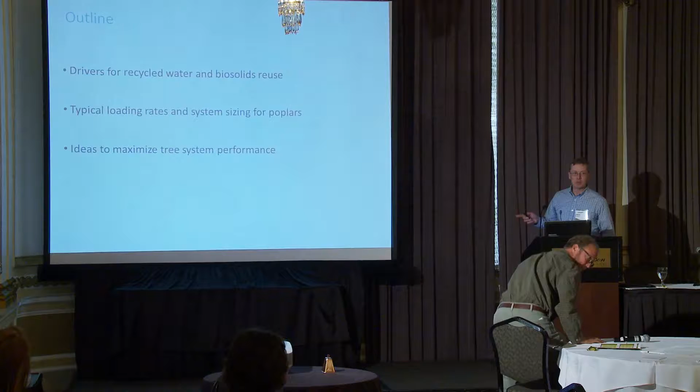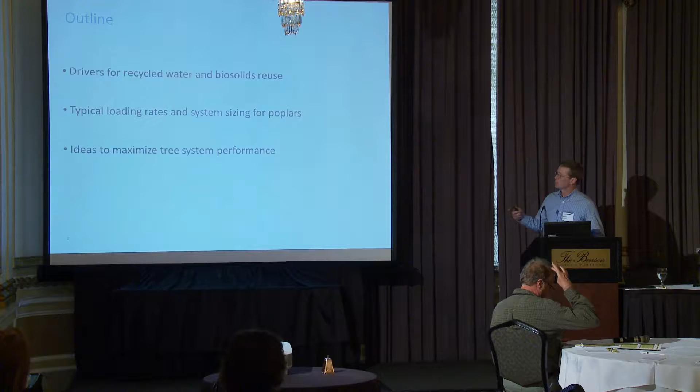So I'm going to start with just a few drivers for recycled water and biosolids use, what causes a municipality to consider this option amongst all the things it could consider for treatment. Share a few slides on typical loading rates, nitrogen and hydraulic loading that we use in the Northwest, and then a few ideas to maximize tree system performance.

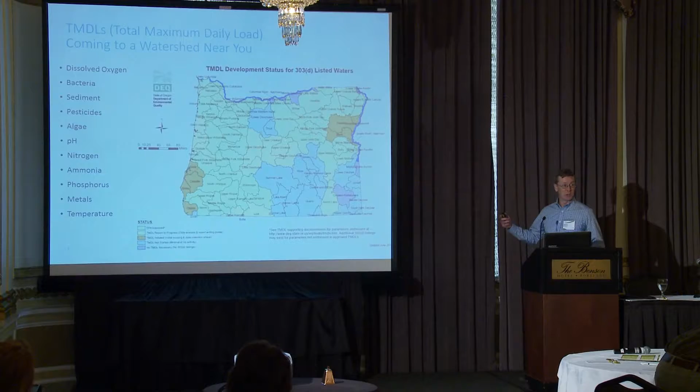So this is a map of total maximum daily load development status in Oregon. The same story applies to the rest of the states in the U.S. really, but as regulations develop, permits don't become less stringent due to anti-backsliding rules. They only become more stringent. So every new permit cycle comes with more limits.

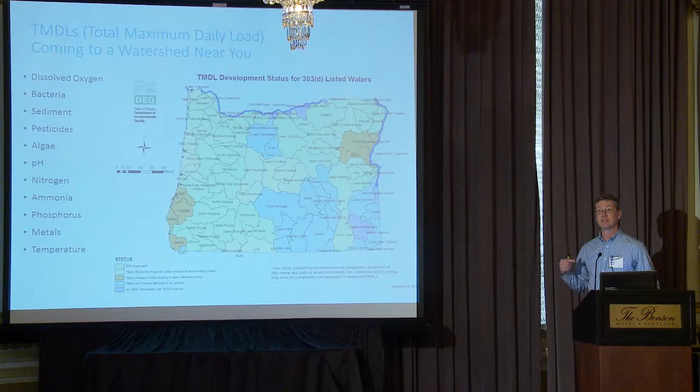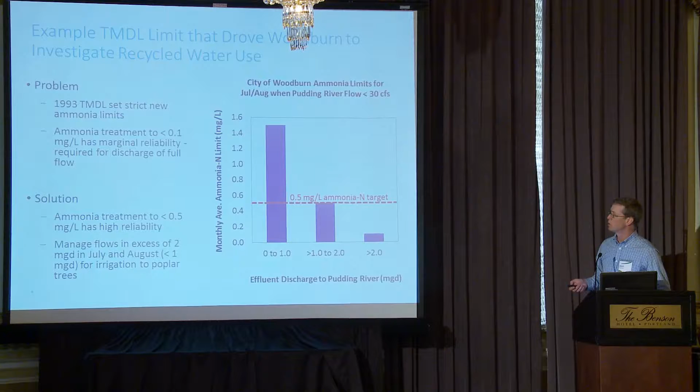And some of these load-driven limits are starting to drive down to limits that test the technological limits of wastewater treatment. In that case, recycled water use becomes an obvious option. So here's one example from City of Woodburn. Curtis is going to talk about more of this later, and you might join the tour also. But just briefly, this is a good example of that.

With TMDL in 1993, there was a new mass load limit for ammonia discharged to the Pudding River. To allow continued full discharge of the plant flow in the summertime, you would have to treat ammonia down to below 0.1 milligrams per liter on a monthly average basis, which is difficult, if not impossible, to reliably do, and very costly to approach that limit.

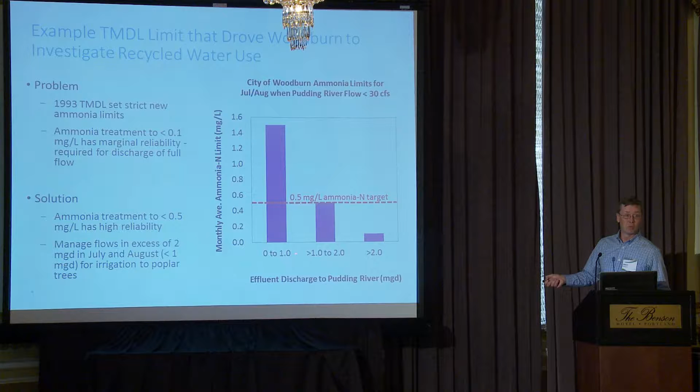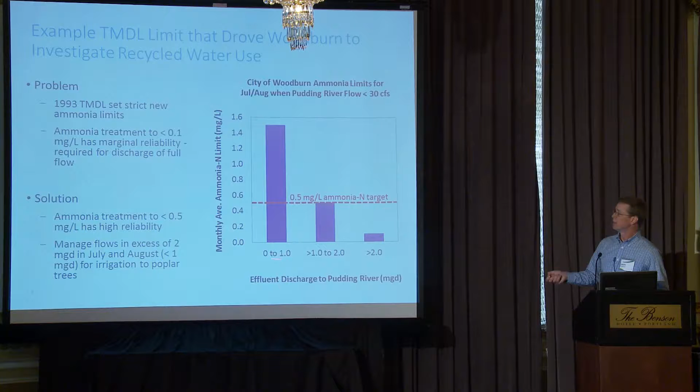With that mass load limit, though, if you look at discharging a lower volume, this chart here is showing at a discharge greater than 2 MGD, you have to treat down to 0.1 milligrams per liter. If you could keep your discharge down below 1, you only have to treat down to 1.5. To be able to discharge up to 2, but no greater, the limit is 0.5 milligrams per liter. That's something that's achievable in the plant with an advanced secondary wastewater treatment facility.

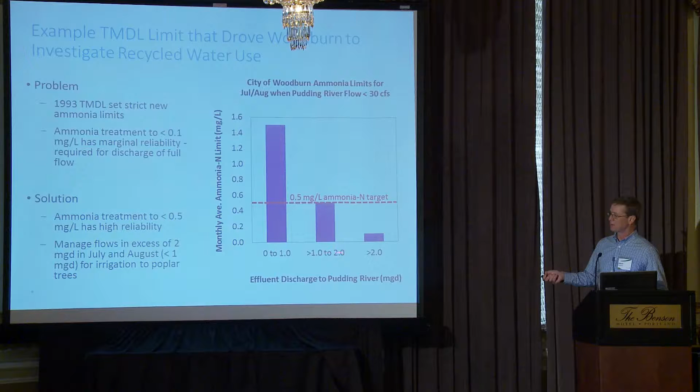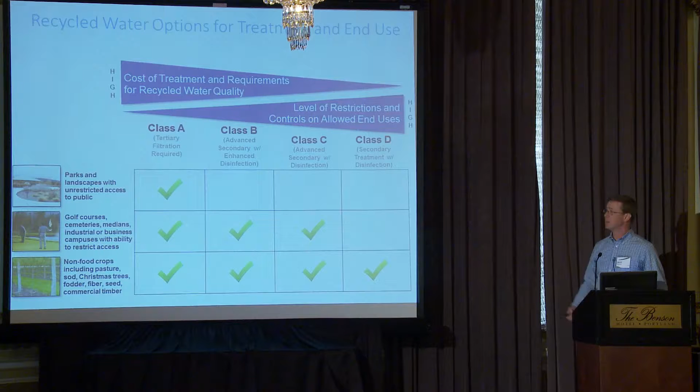So with that limitation of no greater than 2 MGD, that excess can go to some other out-of-stream recycled water use, and that's the opportunity here. There are a lot of options for recycled water use if you look at getting that water out of stream. Most secondary treatment facilities are producing a Class D water, secondary treatment with disinfection. And poplar tree irrigation is one of the allowed uses in Oregon, along with other non-food crops.

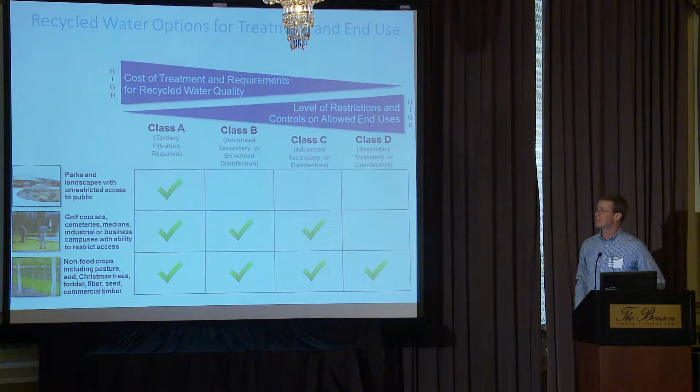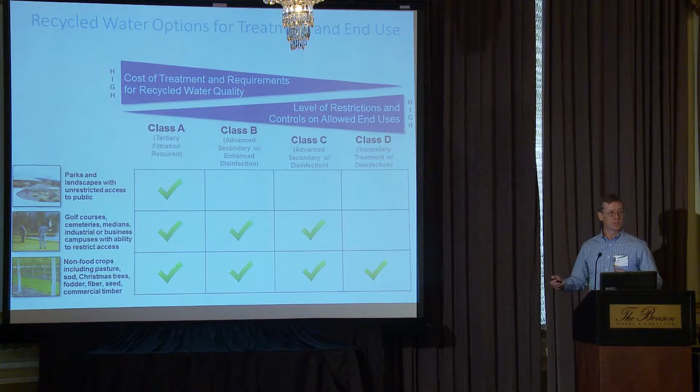If you wanted to be able to apply that water for non-potable irrigation use in an unrestricted public access setting, a golf course landscape, you'd have to install additional treatment to get up to a Class A standard recycled water that requires tertiary filtration and advanced disinfection, which is an additional cost and additional operations issue at a facility.

So one of the benefits of poplar trees in this context is that Class D compatible use, low maintenance and infrequent harvests. Most of these systems are being operated within a larger wastewater treatment facility, and usually the staff is focused on wastewater treatment and meeting permit limits, discharge limits. So something that's easy, to separate some of those activities of the tree management, make it as easy as possible for treatment plant staff, is an important consideration.

There's a potential to use both recycled water and biosolids, and Todd talked about MWMC, which was driven by biosolids use. Curtis is going to talk about Woodburn, which was driven by recycled water, but both of them have the opportunity to use both of those resources beneficially. The high water and nutrient utilization capacity I'll get into a little bit more, and then the buffer issue.

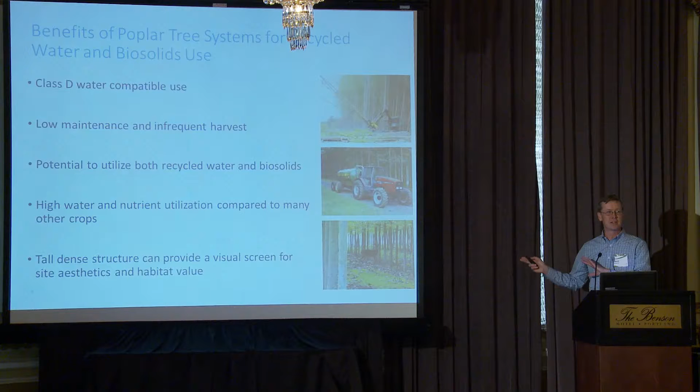There was some discussion earlier about male and female clones. Typically, all these sites focus on male clones because of the potential for the cotton that's generated to play havoc with the wastewater treatment process. You don't want that cotton overloading your clarifiers.

So like any other wastewater treatment process, you need to understand the whole system and manage it as a system. And because this is a natural system out in the environment, which is very complex, there's a lot of analysis that needs to go into site selection and site management.

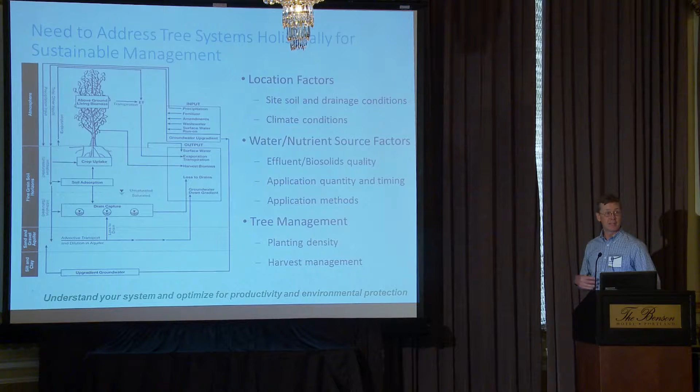Location factors, the specific site soil and drainage conditions, making sure you're not in a too poorly drained or wet site. The climate conditions which affect the irrigation water demands. The water nutrient source factors on the recycled water and biosolids quality coming at the system, the application methods, and then a whole host of tree management factors. All of these need to be looked at together as a system to be able to ensure responsible environmental management.

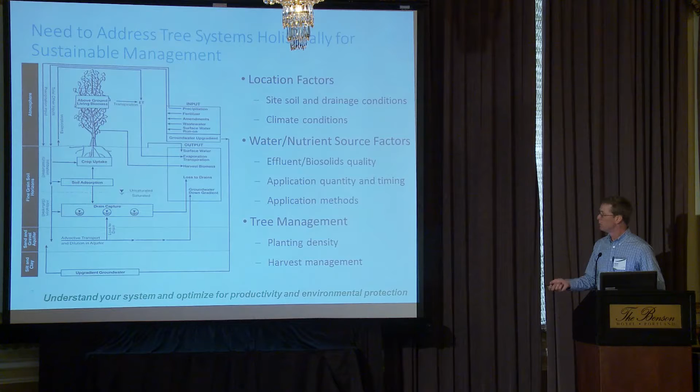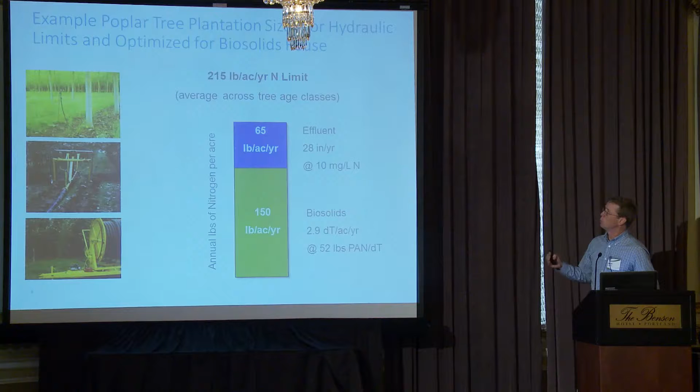So an example here, again for Woodburn, where the primary focus was that effluent diversion away from river discharge to meet an ammonia limit. So with a little bit over 2 acre-feet per acre per year, 28 inches, application, effluent quality with total nitrogen content of about 10 milligrams per liter, you're applying about 65 pounds per acre per year of nitrogen. With a 215 pound per acre plantation average nitrogen agronomic loading limit, that creates an opportunity to beneficially reuse another about 150 pounds per acre of nitrogen contribution from biosolids, which in this case is about 3 dry tons per acre.

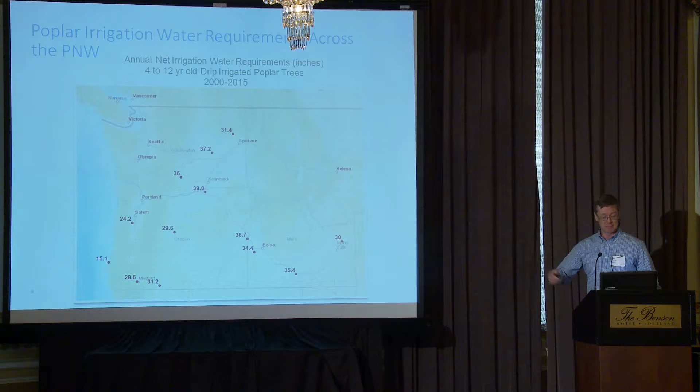Columbia Basin up in Hermiston, you're looking at about 40 inches net irrigation water requirement a year. You go out to a coastal site here, Bandon, and it's 15. It rains a lot. You have a shorter summer period where you have a need for that supplementary irrigation. In the Willamette Valley, about 24. So, there's almost a threefold difference within the same state. So obviously the site factors are an important consideration in planning one of these systems.

So if you look at this system operating to meet a permit limit and the capacity of that system driven by the net irrigation water requirements averaged over an entire stand, that harvest rotation and the impact on total system capacity is an important consideration. Along with that comes all the harvest factors too. If you have a small site, you can only dice it up into so many small pieces before individual harvest units become so small they're probably not economically viable units. So this, along with harvest planning, are important considerations.

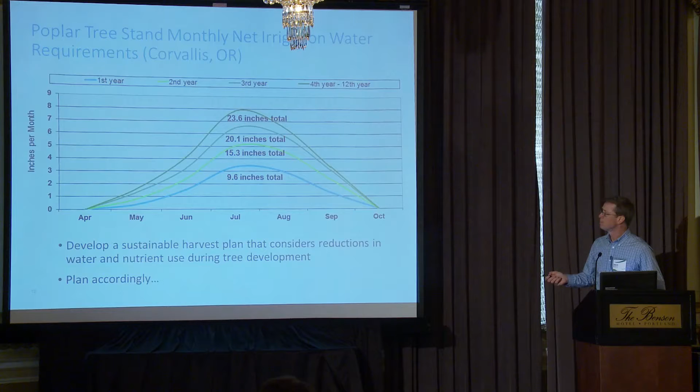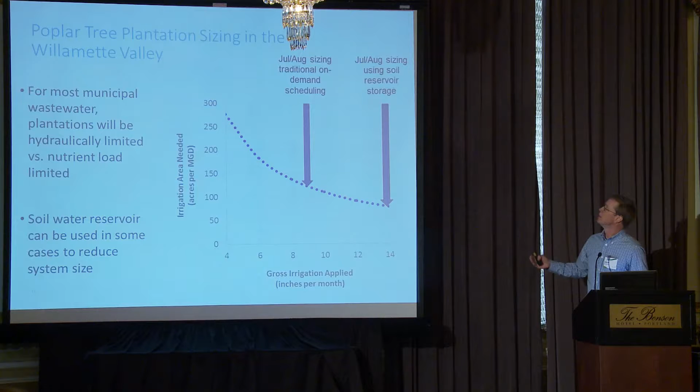Relating those irrigation water demands back to kind of a wastewater treatment plant operator perspective of how many acres per MGD discharged of poplar trees do I need for one of these systems? If you look at traditional on-demand scheduling, applying water just as it's needed throughout the entire irrigation season here in the Willamette Valley, you're looking at on the range of 125 acres per 1 MGD utilization.

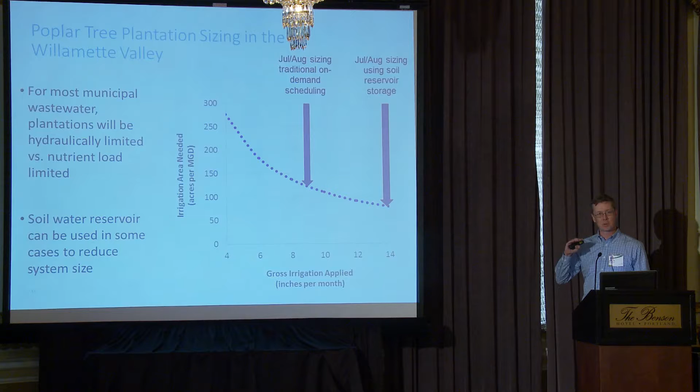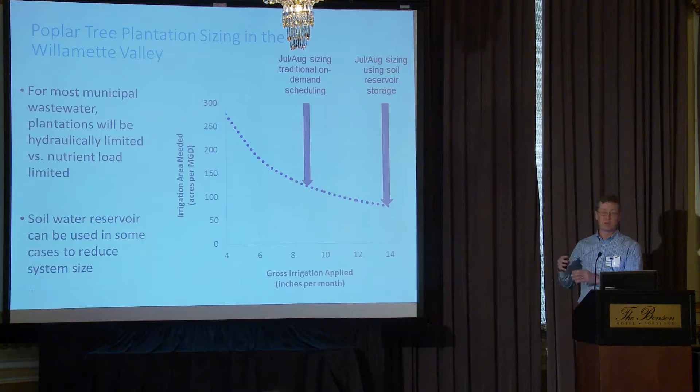Because poplar trees are deep rooting, once they get established, have a large root system and root mass, and a soil water storage reservoir to draw from, you can deficit irrigate poplars once that root system is tied into deeper water reserves. Deficit irrigate through the early season, catch up with that lack of irrigation early in the season, refill the profile, catch up with ET during that peak period, like in the case of Woodburn, where their irrigation season is essentially July and August, but trees are needing supplemental irrigation water from April through October. And then cut off irrigation at the end of that period, allow them to draw off that reservoir. With that sort of approach, you can drive that 125 acres per MGD down to about 80, 85.

There is a wide range of data in the literature on poplar nitrogen uptake rates and recommended agronomic nitrogen application rates. And poplars do take up a certain amount of luxury nitrogen consumption if provided. You can see rates here, from 75 pounds per acre per year up to almost 350. The recommendations we typically go with and that DEQ has been comfortable with here in Oregon are the Washington Department of Ecology guidelines, which start at about 50 pounds per acre per year, go up to about 240 maximum.

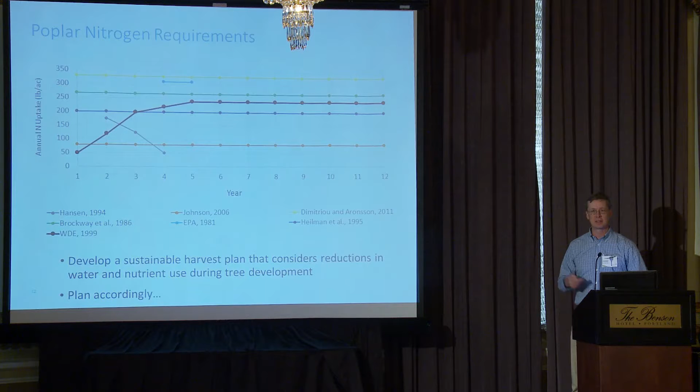Again, tied back to that plantation, harvest, and replanting strategy, you both have a reduction in water utilization and nitrogen utilization in those early years. So you need to plan ahead for that and be able to make sure that the system can maintain the capacity that the compliance requirements dictate.

So a few important agronomic factors. The primary goal is to maximize that tree growth for high rates of biomass relating to nitrogen consumption, high leaf area relating to water use, getting that canopy closure early. Selecting proven varieties is important. We've had some discussion about that today. And again, integrating the plantation management plan and rotation age with the final products that are being targeted.

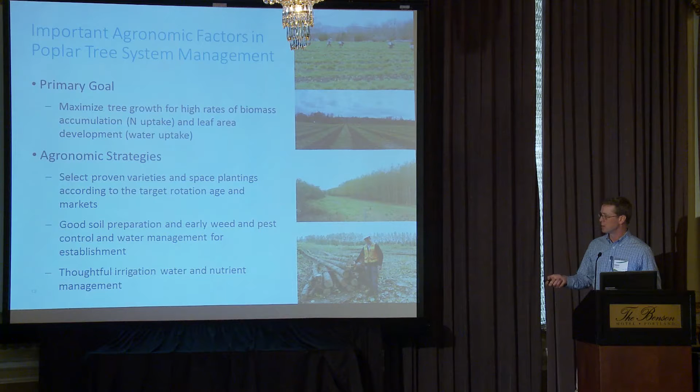Good soil prep and early weed and pest control and water management are really key. That first 3 years is where the sites typically, if they're going to have problems, they're going to have them then, and if you're going to have a failure, it's going to be then. So once you get past that point, it's not completely out of the woods, so to say, but it's definitely lower maintenance past that point. So paying close attention to that period is important. And then thoughtful irrigation, water, and nutrient management throughout that growth cycle.

Just have 2 more slides here. In terms of irrigation system factors, the irrigation system has to be fully integrated with the treatment plant operations to make it as easy to operate as another treatment process in the plant, and to make that system sustainable to meet those discharge goals that it was designed for.

There are a lot of components that go into those irrigation systems, and the devil's in the details there, making a system that's compatible with the overall management of the site, not only the day-to-day irrigation scheduling and application, but being able to pull that system back for harvest, being able to redeploy it as needed, and being able to apply the quality of water that's needed in the quantities and at the right timing.

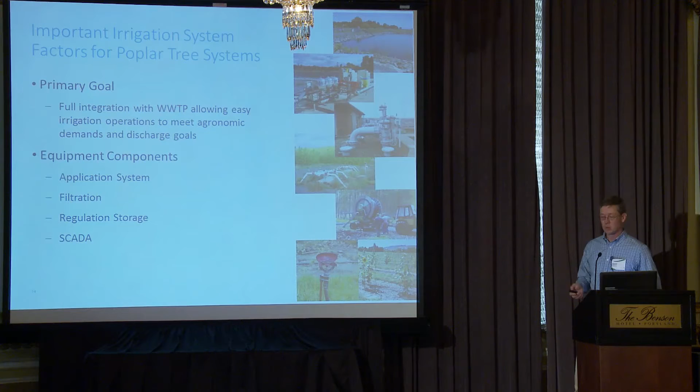So track the actual performance of that system. At least here in Oregon, soil nitrogen is now required for any biosolids application site, not so specifically for recycled water sites, but it's a good idea to be tracking that over time and really understand that system performance. Your maximum sustainable application for that site may not be up at the recommended maximum rates. It could be something lower, so it'd be good to know that.

Again, I can't stress enough planning for that low nitrogen utilization and really forecasting what the total plantation demand is, both for nitrogen and water, in response to harvest cycles, and then maximizing biomass production rates, again, tied back to that site performance. If you can sustain a vigorously growing, healthy system throughout its harvest rotation, you're likely going to be doing pretty good on water and nitrogen utilization.